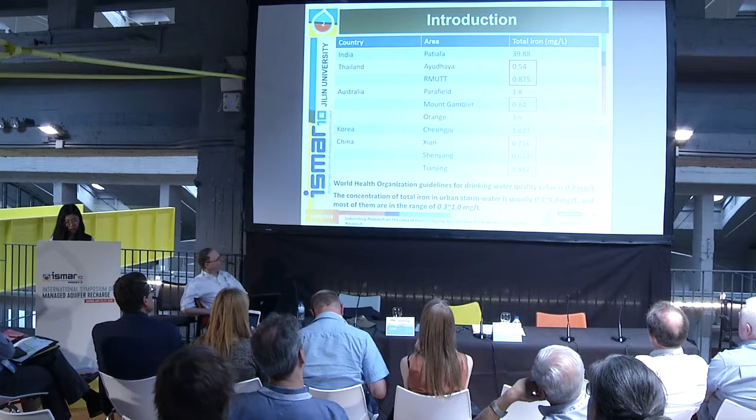But we can see, except for the extremely special condition of India, the content of iron in urban stormwater is usually 0.3 to 5 milligram per liter, and most of them are concentrated in the range of 0.3 to 1 milligram per liter.

And according to the quality of the stormwater, we set up the indoor recharge experiment under the condition of 3 inlet iron concentrations, 3 infiltration media and 3 infiltration velocities. And we analyzed the law and mechanism of iron clogging.

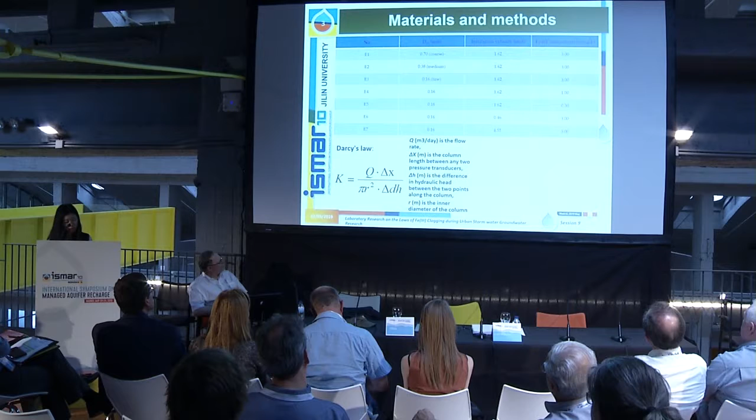The variation of permeability is obtained by using the Darcy formula, and the sedimentary law of iron is obtained by mass ratio. The recharge experimental device is divided into 4 parts: water supply, sampling collection, seepage column, and measuring pressure.

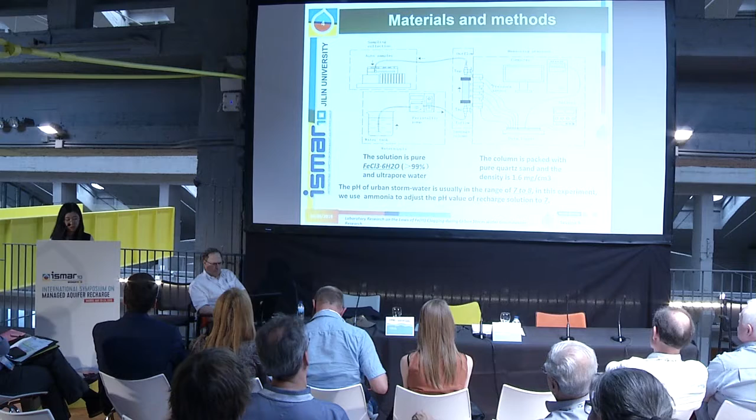Because the pH of urban stormwater is usually in the range of 7 to 8, in this experiment we use ammonia to adjust the pH value of the recharge solution to 7. And for results, we have 3 parts. First is hydraulic conductivity changes.

The hydraulic conductivity changes were calculated as the permeability ratio, and we divided it into 3 parts. T1 is the permeability maintenance stage, T2 is the permeability rapid decline, and T3 is the permeability slow decline or stable stage.

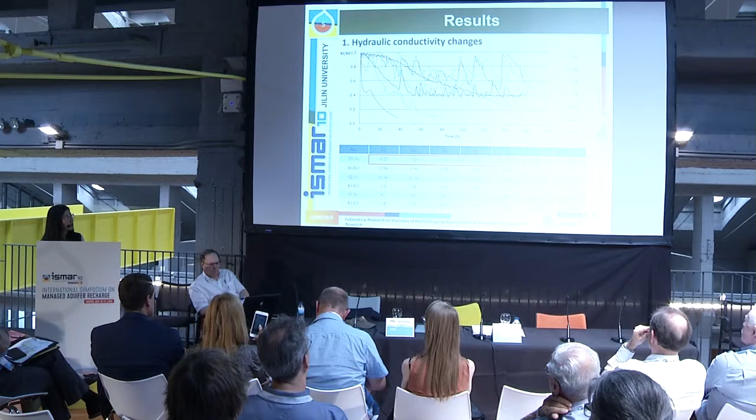And we can see, in addition to E3, for the different infiltration media and inlet concentrations, the T1 is usually about 20 hours, and for high concentration, after 80 hours, the final permeability value is about 80% of the initial value.

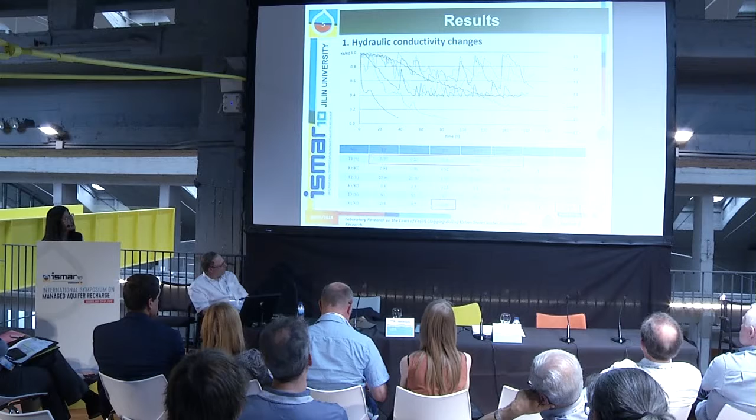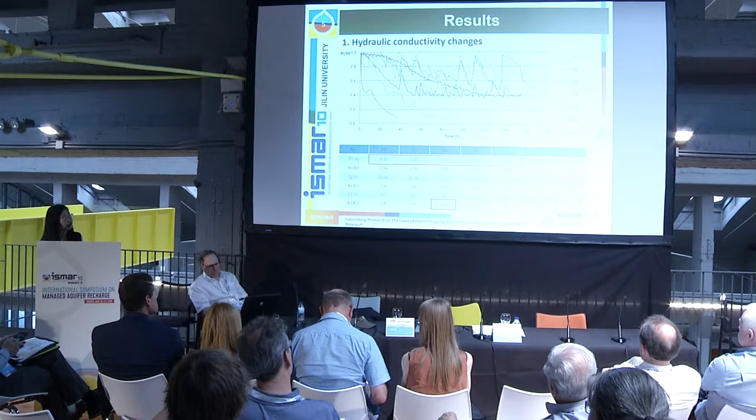And for different inlet concentrations, the medium concentration is about 20% of the initial value, and the low concentration about 40% of the initial value. For the finer sand and high inlet concentration, it's over 90% of the initial value. And for the higher infiltration velocity, it only needs 35 hours to reach the final permeability value of the initial value.

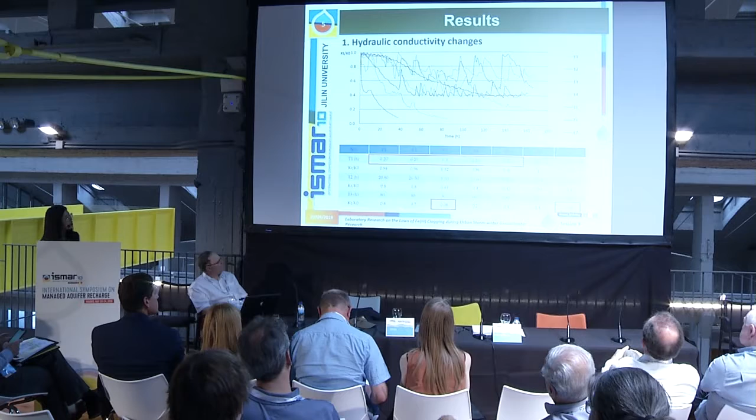And permeability decrease for the column inlet is similar to the whole column changes. In the remaining part of the column, the change of hydraulic conductivity is slower and over a much smaller range. Therefore, hydraulic conductivity changes mostly occurred in the inlet.

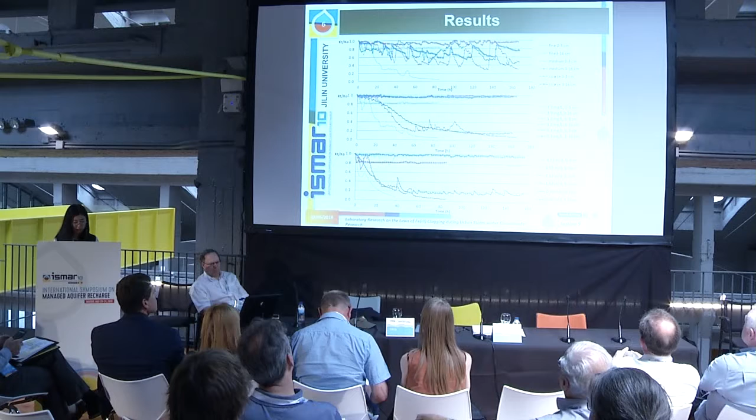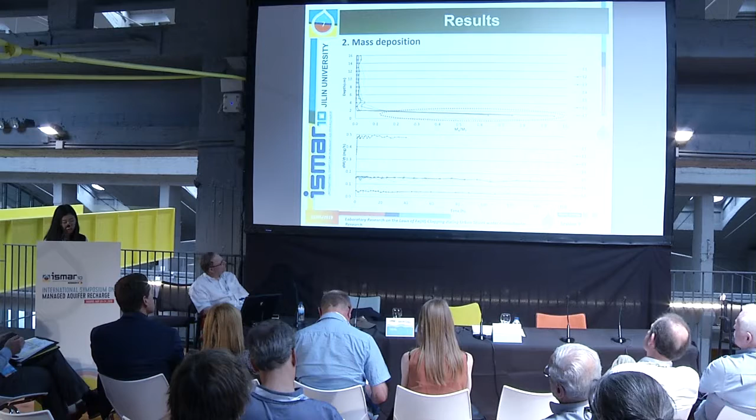The mass deposit distribution was also obtained by dismantling the column at the end of the experiment. Most iron was deposited within 0 to 1 centimeter from the inlet, and the higher infiltration velocity has a higher mass deposition rate.

For all experiments, except for coarse sand, over 80% of iron was deposited on the column, and for higher infiltration velocity, concentration, and finer sand, over 90% of iron was deposited within 0 to 1 centimeter, and they also have the higher mass deposition rate. High infiltration velocity has the highest mass deposition rate, which is 0.47 milligram per hour.

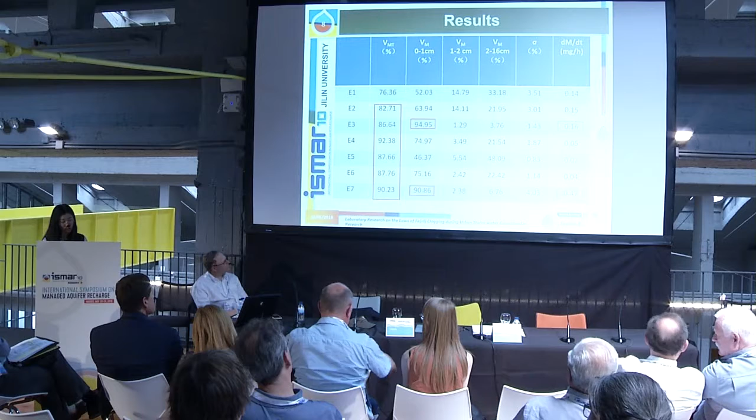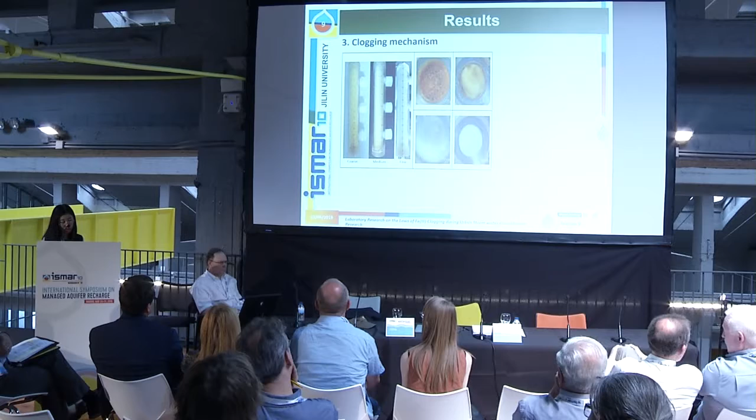According to the experimental phenomena and the clogging law, we think the clogging mechanism has adsorption and filtered interception. Iron will become iron hydroxide precipitate at a pH value greater than 3. So when we use the recharge solution with pH 7, iron in the recharged water is iron hydroxide particles with a diameter of about 1 micron.

And the SEM picture of recharged water shows higher inlet concentration increases the number of iron hydroxide particles as well as their diameter. We can see the different infiltration media SEM pictures, which are at the end of the experiment from the column inlet and outlet.

The medium sand and the finer sand were covered with much more iron hydroxide than the coarse sand, and for outlets, the coarse sand exhibits a little iron hydroxide particles, but the finer sand outlet looks like it doesn't have any.

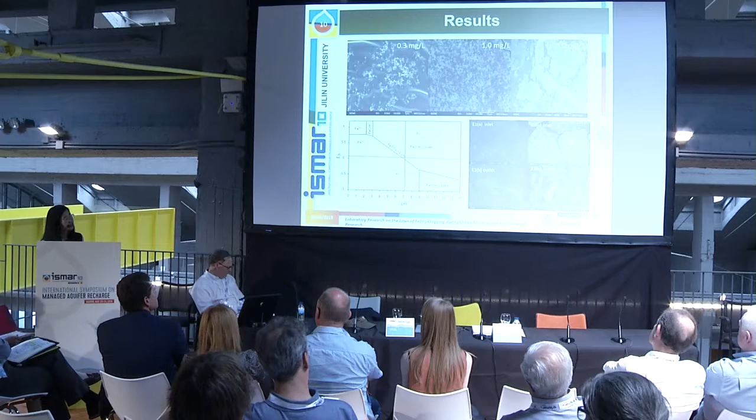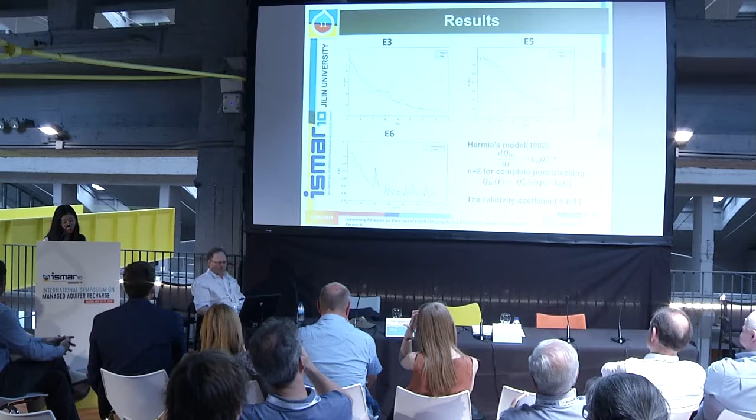When we use the surface clogging model to simulate all fine sand experiments' hydraulic conductivity changes, the correlation coefficient is over 0.95. So we know the fine sand clogging mechanism is surface filtration interception. All the adsorption experiments fitted the pseudo-second-order kinetic equation. It means the adsorption is mostly chemical adsorption, and fitted the Freundlich equation with a constant less than 0.5. It means the adsorption is not easy to happen.

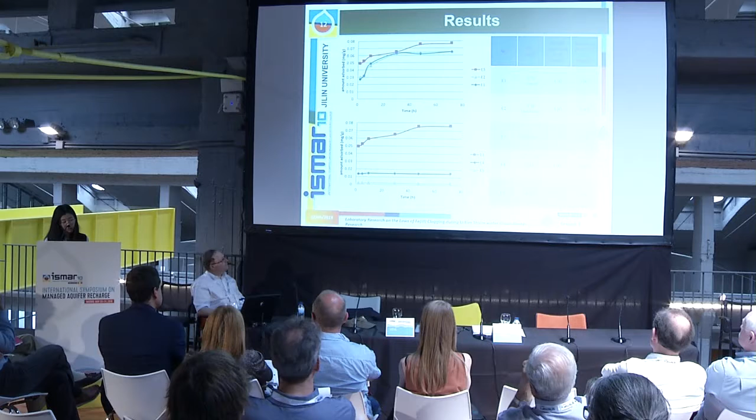So, according to the phenomena of clogging and simulation, we can get some conclusions. First, iron clogging usually occurs on the surface of the infiltration medium. The occurrence time, the depth, and the degree of clogging are all affected by the size of the infiltration medium, the infiltration concentration, and the infiltration velocity. Second, iron mostly remained near the surface of the infiltration medium, and its retention rate and retention quantity were affected by the size of the infiltration medium, the inlet concentration and the infiltration velocity.

Finally, the main mechanism of iron clogging can be concluded as filtration, and the substance causing the clogging is iron hydroxide particles. And other clogging models, such as intermediate clogging and mixed clogging, are being built.

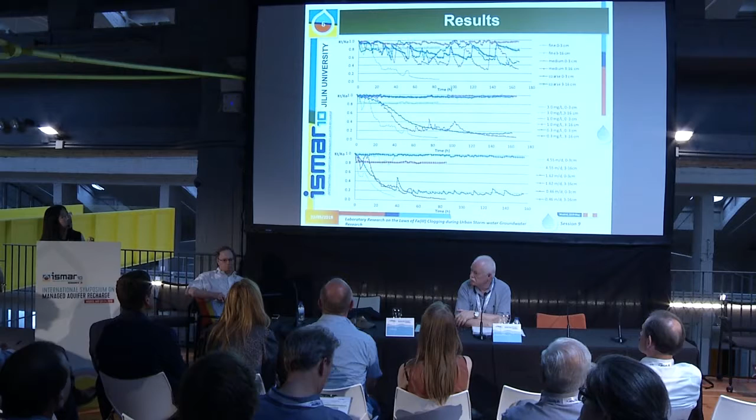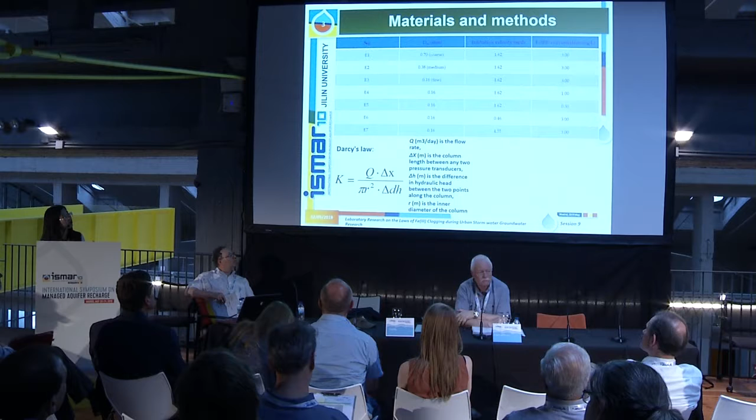One other question. In one of your first tables, you showed really high concentrations of iron. So these are real measured concentrations in urban stormwater. I was really surprised by these high levels. Do they occur as suspended iron flocs, or is this still ferrous iron 2? Do you know something about this? So the iron that gets into a filter system, is that suspended iron 3, iron flocs, or still iron 2? Sorry? This picture? Yeah, this one. Oh, okay.

The iron in this picture is some from articles and some from our tests. It's the urban stormwater where it was measured. It's just stormwater, the rainwater. Do you have any idea why it can get that high, like up to 40 milligrams per liter in India? Was there a specific reason for that? The India data is from a paper I saw. Right, okay.

I can comment a little bit on the Australian examples up there in relation to the iron, and it's not unusual for us to see 2 milligrams per litre up to 15 milligrams per litre. It's typically iron 2. Over the last couple of years, we've seen a spike in the iron concentrations in urban stormwater runoff, as well as aluminium concentrations, associated with a change in pH of the stormwaters due to the very dry conditions we've had recently. And as soon as we've had some really good heavy rains, those concentrations decreased. But it is mostly iron 2.

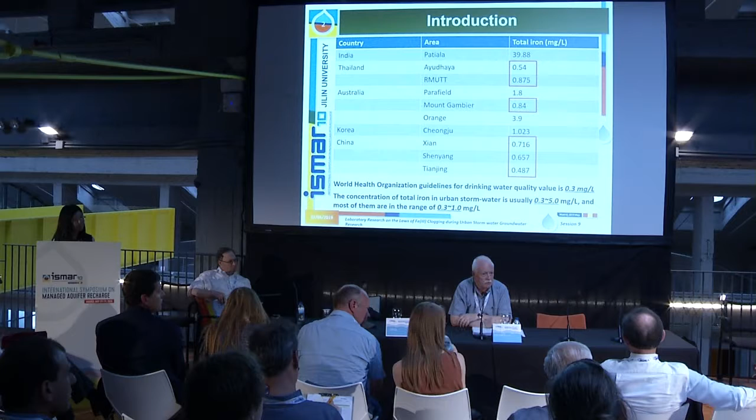It could also be leakage of sewage effluent in the system. Yeah. We hope not, at least in the Adelaide ones, because we do a lot of checking for sewer leaks. But sewer overflows and sewer leaks are a risk in an urban stormwater harvesting environment. Yeah.